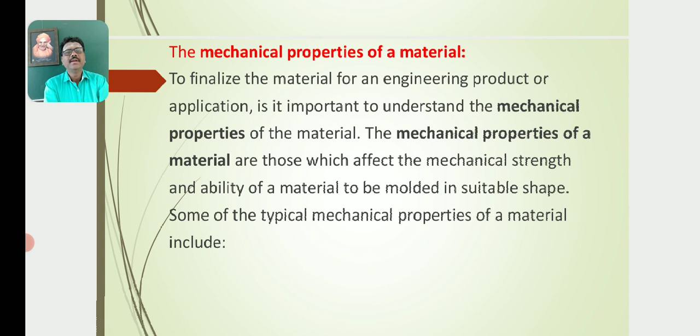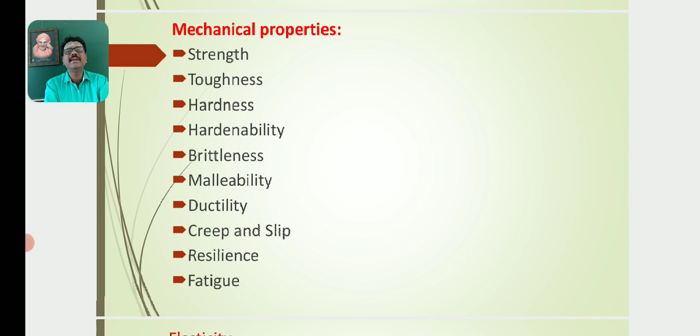Here are given some of the typical mechanical properties of a material: strength of the material, toughness of the material, hardness, hardenability, brittleness, malleability, ductility, creep and slip, resilience and fatigue. So these are some of the mechanical properties. We need to study these properties for various engineering products or applications. Now we have studied properties such as elasticity. This is a very important property for engineering products or engineering applications.

In the previous class we discussed what is elasticity, then what is stress, different types of stress, strain, different types of strain, then modulus of elasticity, Young's modulus, bulk modulus, rigidity modulus, a stress-strain graph, and so on. So elasticity means the ability of a deformed material body to return to its original shape and size when the forces causing the deformation are removed. A body with this ability is said to behave elastically.

We know that in our universe, matter can be classified into three types: the liquid state, the gaseous state, and the solid state of matter. Further, solids can be classified into three types: rigid bodies, elastic bodies, and plastic bodies. Rigid bodies are those which do not change their shape and size even under the action of a huge amount of external force. Rock and iron are examples of rigid bodies.

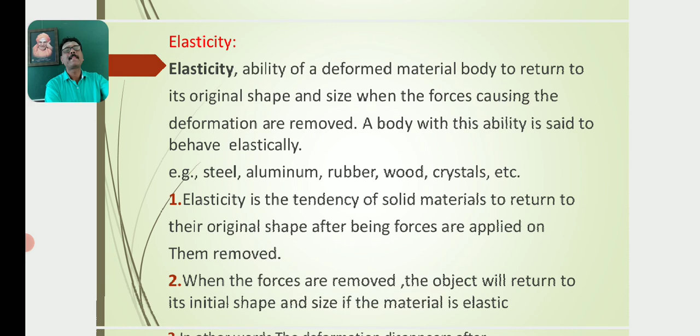When the forces are removed, the object will return to its initial shape and size if the material is elastic, if it exhibits the property of elasticity. In other words, the deformation disappears after removal of external forces. Steel cables, rubber bands, springs are examples of elastic materials.

So then what is stress? It is a restoring force per unit area. When external forces act on a body, say an elastic body, forces are generated inside the body opposite to the external applied force. Such a force is called a restoring force. Stress is the restoring force per unit area. Its SI unit is newton per meter square.

Usually the stress is measured in terms of the external applied force, because under the equilibrium condition the restoring force must be equal to the external applied force. Then strain is the ratio of change in dimension to the original dimension. Again, we have different types of stress and different types of strain. All of them were discussed in the previous class.

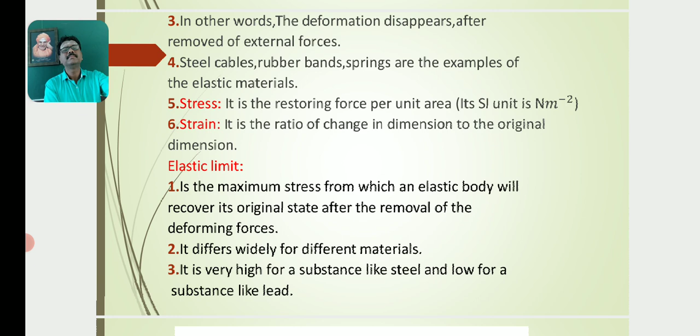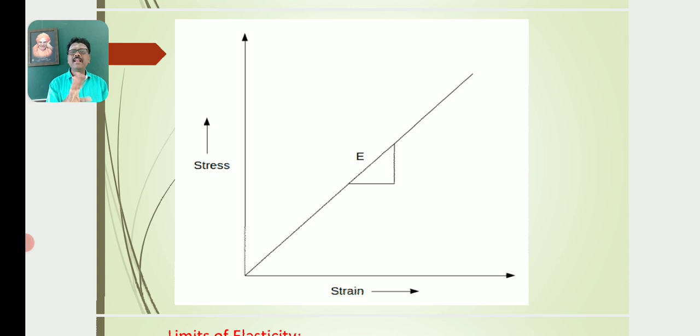Stress by strain gives the modulus of elasticity. Up to the elastic limit, the material obeys Hooke's law. That means within the elastic limits, stress is directly proportional to strain. Removing proportionality, we put a constant E. Then E is equal to stress by strain, where E is known as modulus of elasticity or coefficient of elasticity. The straight line indicates that there is a linear relation between stress and strain.

Limits of elasticity. As I mentioned, just beyond the limit of proportionality, the material can behave in a non-linear elastic manner until the elastic limit is reached. If the applied force is large, the material becomes plastic and no longer returns to its original length when the force is removed. In short, the value of force up to which the deformation entirely disappears on removal of the force is called limit of elasticity. Elastic limit is nothing but limit of elasticity.

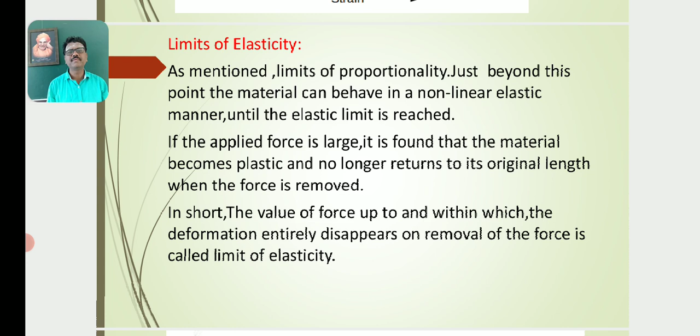So just beyond the limit of proportionality, the material can behave in a non-linear elastic manner until the elastic limit is reached. It is a limit up to which stress is directly proportional to strain and Hooke's law is obeyed. Up to that point the body exhibits an elastic property; beyond the elastic limit the body loses its elastic property and exhibits plasticity.

So now you see the stress strain diagram. As stress increases, strain also increases linearly up to a certain point known as the yield point. Up to the yield point the line is straight, indicating a linear relation between stress and strain. Up to the yield point the body exhibits elasticity. Beyond that, the body does not regain its original shape and size. Gradually the body loses its elasticity and exhibits plasticity.

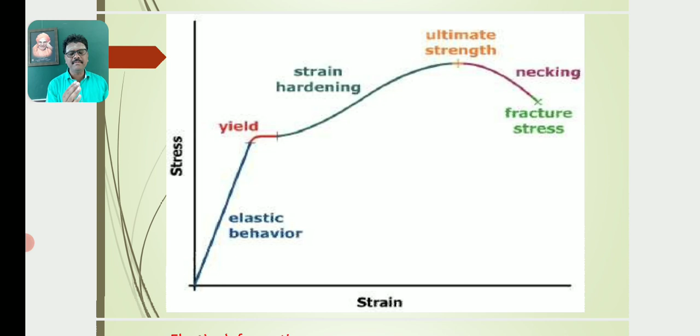After the ultimate strength, the body increases in length even with no additional load applied, so called necking. Finally it reaches the fracture stress, at which point the body breaks. So this graph gives an idea about the behavior of the material when we plot stress versus strain.

So elastic deformation: the proportional limit and the yield point. Up to that, there is a linear relation between stress and strain, that means stress is directly proportional to strain. Proportional limit is the point up to which Hooke's law is applicable. Elastic limit is the point up to which the elastic material regains its original shape and size on removal of the applied force.

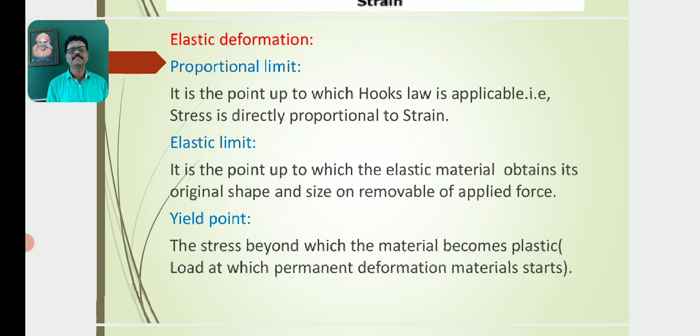Then yield point, the stress beyond which the material becomes plastic; the load at which permanent deformation starts. Plastic deformation, the ductile point: beyond this point the material acquires a plastic nature. Then ultimate point, the point at which the material can withstand maximum load and ultimate strength with maximum elongation. Ductile point means beyond this point material acquires plastic nature.

Ultimate point is the point at which the material can withstand maximum load and ultimate strength with maximum elongation. Then what is the point of fracture? The stress which makes the material fail or break is called the point of fracture.

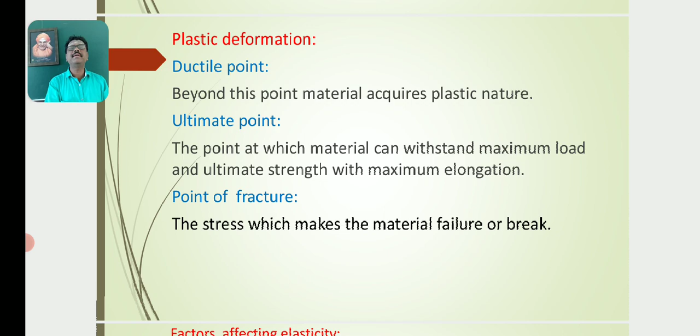So now let us discuss factors affecting elasticity. Materials change in their elastic property because of the following factors: effect of stress, effect of annealing, effect of temperature. First, effect of stress. For a large number of cycles of stress, the material loses its elastic property even within the elastic limits. Therefore, the working stress on the material should be kept lower than the ultimate tensile strength and the safety factor.

If it is under a large number of cycles of stress, if the external forces are applied continuously and periodically, then it loses its elastic property even within the elastic limits. So the working stress on the material should be kept lower than the ultimate tensile strength and the safety factor.

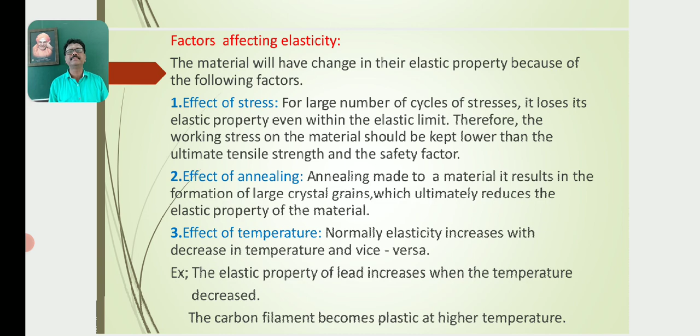The elastic property of lead increases when the temperature is decreased. The carbon filament becomes plastic at a higher temperature. So this is the effect of temperature on the elastic property.

Then the fourth factor: effect of impurities. If some impurities are added to pure materials, what happens to the property of elasticity? The addition of impurities produces variation in the elastic property of the materials. It may increase or decrease, depending on which type of material is added, that is, the nature of the added impurity.

We are given an example. When potassium is added to gold, the elastic property of the gold increases. So the elastic property of the gold depends on the nature of the potassium, the type of impurity added to the gold.

Similarly, another example: when carbon is added to molten iron, the elastic property of the molten iron decreases. So the elastic property of the material depends on the type of impurity added to it. When potassium is added to gold, its elastic property increases. When carbon is added to molten iron, its elastic property decreases.

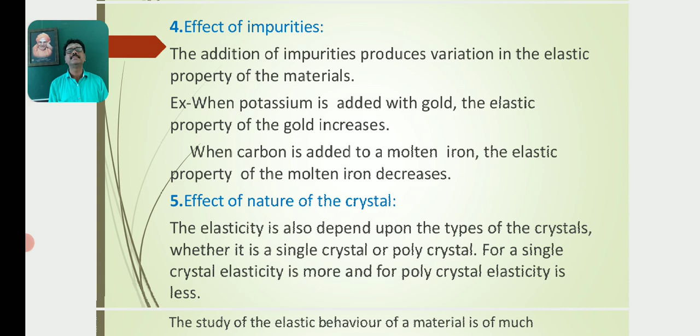So that is the effect of impurities. Then the fifth factor: effect of nature of the crystal. Elasticity also depends on the type of crystal, whether it is a single crystal or a polycrystal. For a single crystal, elasticity is more, and for a polycrystal, elasticity is less. So elasticity also depends upon the nature of the crystal.

So the study of elastic behavior of material is of much importance. Almost every engineering design requires knowledge of the elastic behavior of materials. In the construction of various structures like bridges, columns, pillars, beams, etc., knowledge of the elasticity of the materials used in construction is of prime importance.

So the study of the mechanical property, the elasticity of the material, is more important for engineering design. The engineering design requires knowledge about the elastic property or behavior of the materials. So in the construction of various structures, we must require knowledge about elastic properties of the materials, in case of construction of bridges, columns, pillars, and beams, etc.

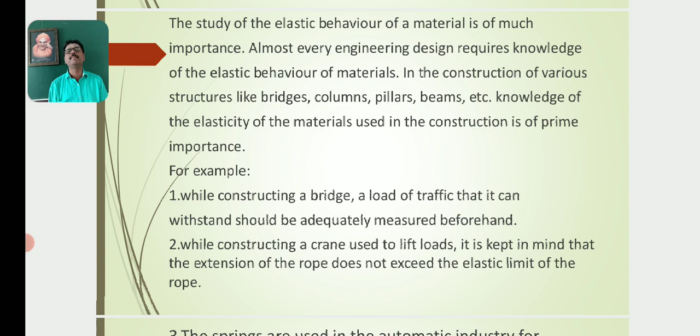So in engineering design, we must study the elastic properties of the rope. Similarly, springs are used in the automotive industry for various parts such as vehicle suspension systems, chassis, automotive valves, clutches and gear shifters.

So these springs are used in the automotive industry for various parts, such as vehicle suspension systems, chassis, automotive valves, clutches and gear shifters. We must need the elastic properties of the spring. In engineering design, the selection of spring materials can be made based on their elastic properties, based on their mechanical properties.

And then, medical equipment used in medical immobilization devices, hospital beds, several dental applications, wheelchairs, lifts and many more. What equipment is used in the medical field? Immobilization devices, hospital beds, several dental applications, wheelchairs, lifts and many more, all can be constructed based on the elastic behavior of the materials.

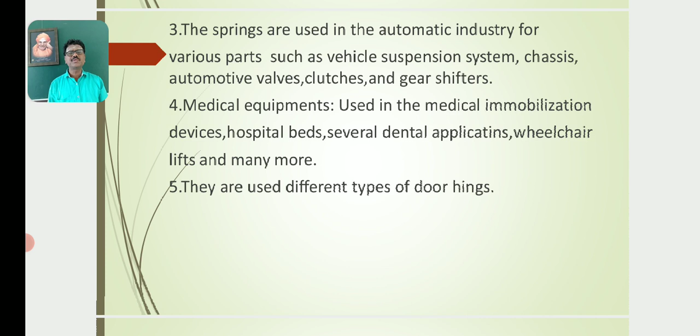That means the study of elastic behavior of materials is required for manufacturing hospital beds, several dental applications, wheelchairs, lifts and many more, and also different types of door hinges. So these are some of the engineering products and applications that must need the study of the mechanical property of materials, that is, the elastic property of materials.

So in this class, we studied the mechanical properties of materials, the list of mechanical properties of materials, then elasticity, the concept of elasticity, elastic limit, Hooke's law, stress versus strain graph, then yield point, ultimate strength, fracture, and then applications of elasticity, and so on. Thank you.